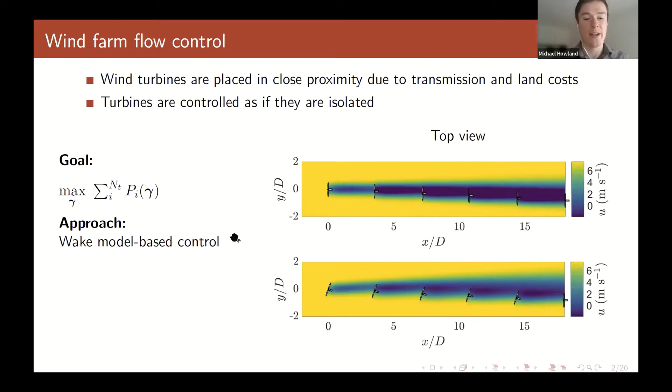The core challenge with selecting a wind farm control strategy based on wake models is that wake models fundamentally parameterize physical processes in the atmosphere. A good example of this is that they parameterize turbulence in the atmosphere and also in the wind farm flows through a wake spreading coefficient.

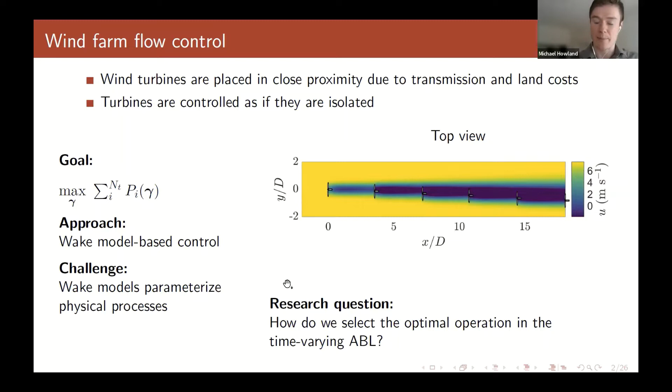Our research question is, how do we select the optimal operation for the wind farm, the optimal yaw misalignment angles, in the time-varying atmospheric boundary layer, which is evolving its mean state in time.

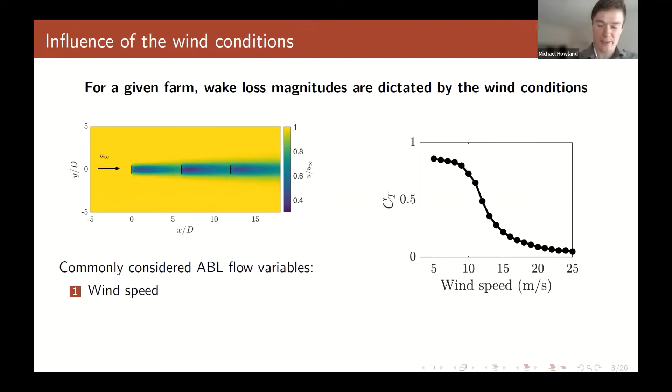I want to highlight a few of the leading order wind conditions which can influence the wake dynamics in the wind farm and therefore influence the optimal control strategy. If we start with a standard base case, here again a wake model with flow from left to right, for standard operation in region 2, where the turbines are in a line and are interacting with each other, we can visualize the effect of a few different atmospheric conditions on this wake interaction.

We can start by looking at the effect of wind speed. As we start to increase the wind speed, we see that the turbine thrust, the coefficient of thrust here visualized, starts to go down, and it goes down non-linearly. As we increase the wind speed, the thrust that each individual turbine imparts on the wind will go down, and therefore the magnitude of wake losses will go down. So we expect that for different wind speeds, our control strategy will change.

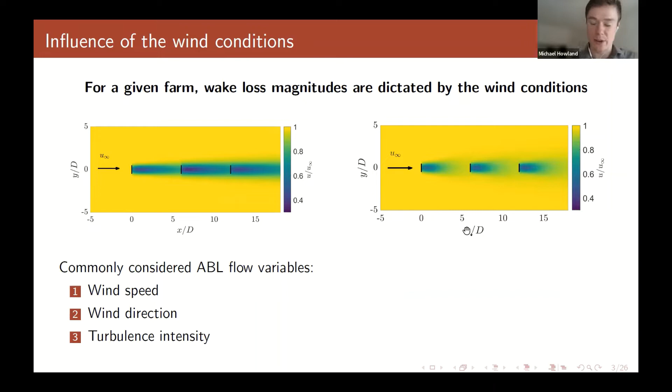Another primary influence in the atmosphere is the turbulence intensity. From left to right, I've increased the turbulence intensity, or the degree of wake recovery and wake spreading, in this wake model visualization. We can see that the wake interactions are less severe, and therefore this will affect the control strategy.

So how has this been handled in the past in the context of wake steering control?

So the standard approach to incorporate these atmospheric conditions that I mentioned on the previous slide has been to use an open loop control strategy where we have some controller which has some low fidelity wake model baked in. We input, it's a parametric wake model, it inputs wind speed and wind direction, which has the influences that I showed in the previous slide.

But we also need to know what the wake model parameters are, and in particular, the wake spreading rate, which dictates the wake recovery. How this has been handled in the past is that the wake recovery has been estimated using an empirical function, which depends on the turbulence intensity. So the turbulence intensity is fed in, an empirical function estimates the wake model parameters, that is then fed into the control, which along with the wind speed and wind direction, is then able to estimate the best yaw misalignment strategy for the wind farm.

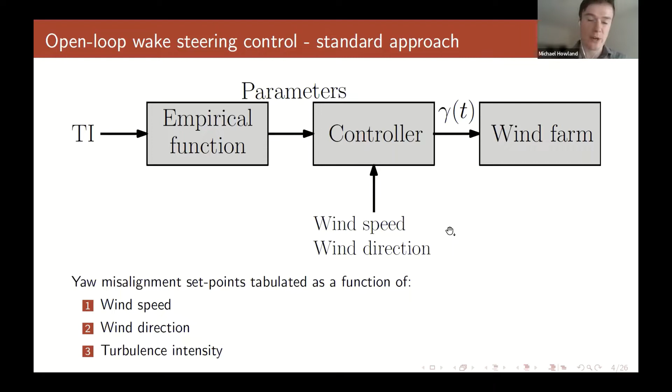And so what does this estimation of this empirical function look like in practice in traditional wake model tuning?

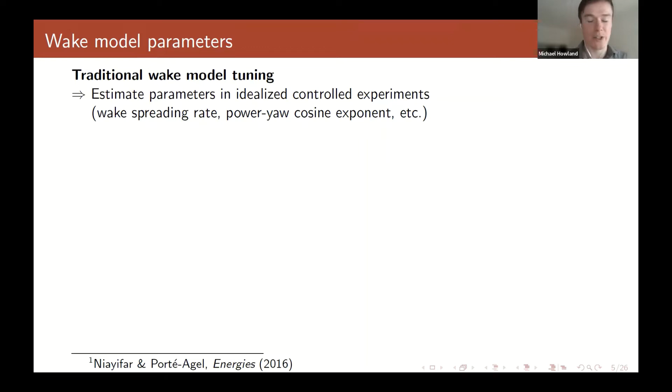In practice, in the past, this has looked like estimating wake model parameters in idealized controlled experiments. Those parameters could be this wake spreading rate, which I've mentioned a few times now, but it could also be other parameters which exist in these wake models. For example, this power-yaw cosine exponent, if you're interested in the power production of a yaw misaligned turbine, or again, it could be this wake spreading rate.

This very nice paper gave us an instructive introduction into this domain where they compared a wake model to large-eddy simulations in an offline tuning experiment. They actually showed very nicely that the wake growth rate, this wake spreading rate in their wake model compared to their simulations, varies pretty much linearly with the turbulence intensity. So this function would then be the empirical function that would be used on the previous slide.

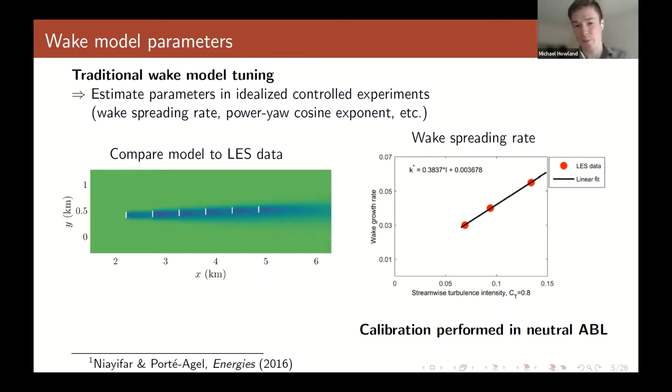This paper has proposed this function. It's been used many times in the past. But it's worth noting that the authors highlighted that this calibration was performed using large-eddy simulations with a neutral atmospheric boundary layer. So this inherently neglects certain properties which exist in the true atmospheric boundary layer. The effects that are often neglected in traditional wake model tuning more broadly are stratification, wind speed shear, wind direction shear, partial wake interactions, and other atmospheric boundary layer effects which may exist in real operational wind farms.

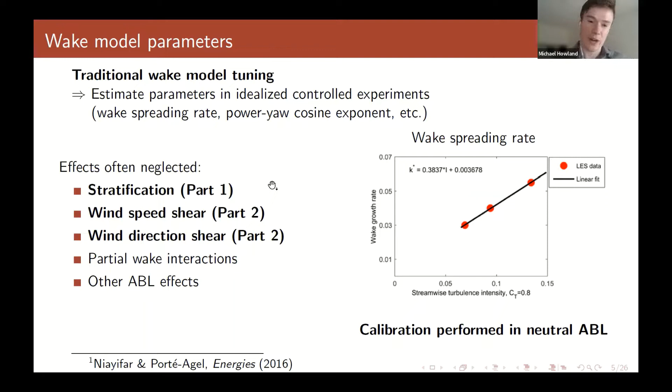So in this particular talk, I'll focus on stratification and also wind shear in parts 1 and 2, and I won't discuss the others.

Coming to the outline, in the first part of this talk, I'll discuss our work developing a closed loop wake steering control strategy with a focus on characterizing the role of the atmospheric stability on the wake recovery. Then I'll discuss our work in power-yaw modeling, which is aiming to elucidate the effects of atmospheric boundary layer wind shear on the power production of yaw misaligned turbines and wind turbines more broadly. And then I'll wrap up with some conclusions and next steps.

Returning to our primary question, we're interested in selecting the optimal operation of the wind farm, and in particular, the optimal yaw misalignment angles in the time-varying atmospheric boundary layer. So for that, we proposed a closed loop control strategy, where we have the wind farm, which is operating at time. It sends its power production measurements in the form of SCADA data, if it's a utility scale wind farm, and also wind conditions.

That's then fed into a parameter estimation routine, which estimates the model parameters that are relevant for the turbine wake model, the control strategy. The controller then estimates the yaw misalignment angles in time, which are then fed also to the parameter estimation and to the actual wind farm to impose.

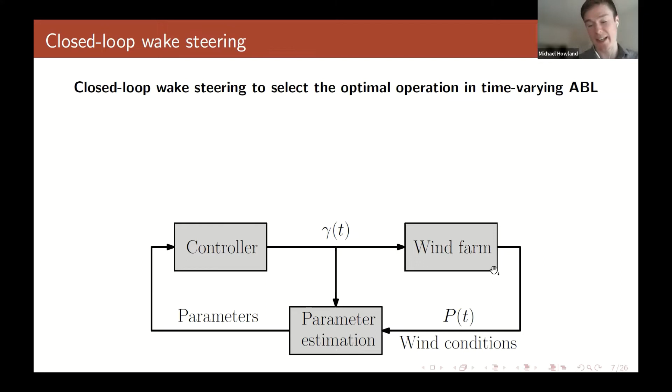The key three strategies that we use in this closed loop control methodology we've proposed are that we do parameter calibration uncertainty quantification based on the measured wind farm data, and we do this in a closed loop fashion in time. We also use a gradient-based optimization methodology, which is proposed in this 2019 paper to enable real-time wind farm control. We also do wind condition forecasting so that we make control decisions based on what's going to happen, or at least our best estimate of what's going to happen in the future, rather than some kind of moving average of what's happened in the past.

So I won't talk much about the wind condition forecasting in this talk, but details of that can be seen in this recent wind energy science paper.

Instead of tuning in an offline setting, which has been done in the past, we approach the parameter estimation more as an optimization problem, or alternatively an inverse problem, where we consider that we have some data Y and some model G, which depends on unknown parameters theta. The goal, very simply, is to minimize the data space objective function, finding theta star that gives the minimum discrepancy between the data we're measuring and our parametric wake model.

It's worth noting that this objective function can be generalized to incorporate regularization, model error, and so on. This can be solved in a variety of ways—one can use gradient-based optimization or derivative-free approaches to estimate theta star. In this talk, we're actually going to use the ensemble-Kalman filter as a parameter estimation methodology for this dynamical system.

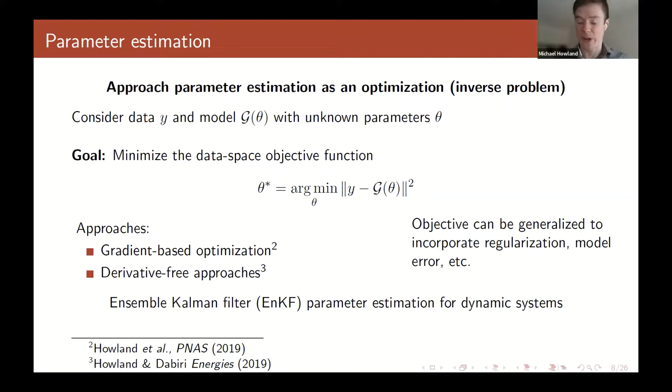But we can go beyond estimating a single value of theta star. We can actually estimate a probability distribution of theta, called a posterior distribution of the model parameters, rather than just a single value. We were interested in the probability distribution of theta, or more particularly, the conditional probability distribution of theta given the measurement of data Y.

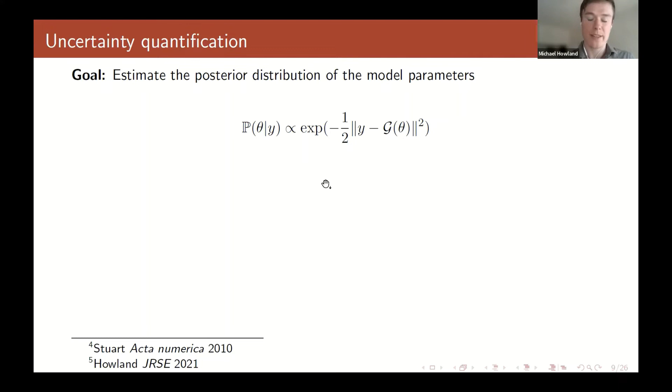If we make several assumptions, for example a Gaussian prior distribution and Gaussian noise based on central limit theorem arguments, then we can find that the posterior distribution is proportional to the exponential of the negative objective function that I showed in the previous slide.

What's nice about estimating the uncertainty of the wake model predictions is that you can then perform a wake steering strategy where you're not just maximizing the power production of the wind farm, but maximizing the expected value of the power production conditioned on the posterior distribution of the wake model parameters. That's what we did in this JRSE paper in 2021.

We found that incorporating the uncertainty in the wake model parameters increases energy production overall during our wake steering studies. It also improved the robustness of the control and quantifies the prediction uncertainty.

Lastly, in terms of the closed loop control strategy we've been developing, I wanted to quickly mention how we actually optimize the yaw misalignment angles. In this 2019 PNAS paper, we developed an optimization strategy based on analytical gradients so that we can perform real-time control.

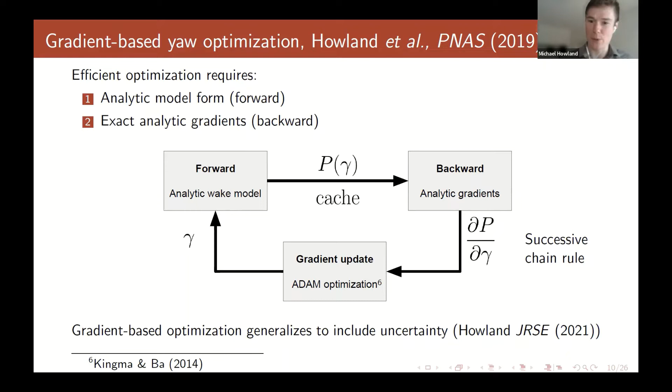That's our general closed loop wind farm control setup. We're quite interested to see how well it performs, and for that we used large-eddy simulation as a testbed control testing environment. We use our in-house large-eddy simulation code called PadeOps, which is a high-order pseudospectral large-eddy simulation code that simulates the stratified atmospheric boundary layer with full Coriolis effects.

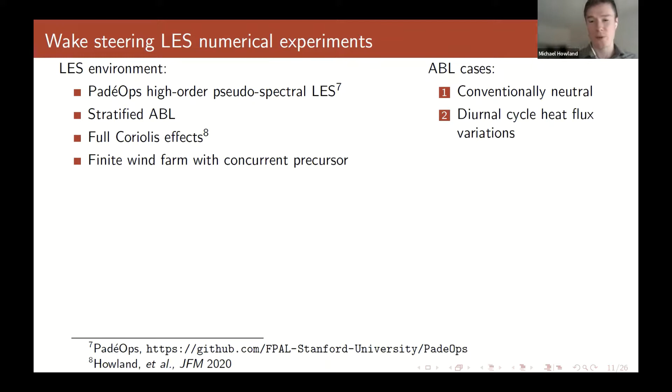We simulate finite wind farm behavior with a concurrent precursor methodology. First we focused on conventionally neutral atmospheric boundary layer, then on diurnal cycles. I'll explain more about each of those now.

We focused on the conventionally neutral atmospheric boundary layer, which incorporates stratification and Coriolis effects, but there's no surface heating. The mean statistics in this boundary layer are quasi-stationary, not evolving significantly in time except for turbulence and inertial oscillations from Coriolis effects. This is a nice testbed environment because the mean states aren't evolving, giving well-defined controller behavior for testing closed loop versus open loop control.

I won't talk much about the conventionally neutral test cases, which can be seen in this 2020 Wind Energy Science paper. Instead, we're more interested in presenting results related to the time-varying atmospheric boundary layer.

For that, we simulated a diurnal cycle with heat flux variations at the surface, which change the statistics in the atmospheric boundary layer as a function of time—the mean wind speed, wind profile, shear, veer, and other details—and change the stability.

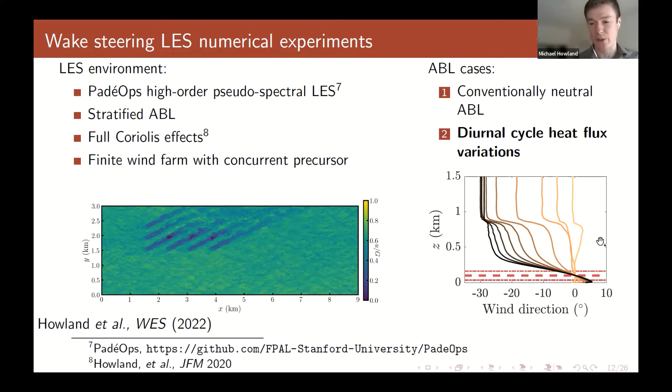I mentioned the wind direction changes as a result of the stability change, and also the wind direction change over the rotor area—so the wind direction shear changes as well. During the daytime, when we're well mixed, there's very little wind direction shear over the rotor area, but as we transition to the nocturnal boundary layer, there are substantial wind direction variations over that rotor area.

The question is, how does the wake model parameter estimation perform in this type of environment where the flow states are naturally evolving? This is a bit of a busy plot, so I'll walk through what each line is step by step. Here's the wind farm setup immersed in this diurnal cycle atmospheric boundary layer simulation.

I'll focus particularly on the power production of turbine 1 and turbine 4. Turbine 1 will always be free stream with respect to incoming wind, which comes either from left to right or from the bottom left corner of the domain, depending on the time in the simulation. Turbine 4 will either be in the wake of turbine 2 or in the wake of turbine 1.

I've plotted three different things. The solid lines are the LES power production for a case where we impose wake steering. The dots are the wake model predictions aided by the parameter estimation methodology I introduced a few slides ago—those dots sit on top of the solid line, and we can see it agrees quite well. Then the dashed line is for reference: a large-eddy simulation power production case where we impose yaw-aligned behavior.

So the wind turbines are always trying to yaw-align themselves and maximize their own power production. We can see generally that the wake model is performing fairly well at estimating the power production in the wake steering case.

We can also see the characteristic signs of wake steering. The power production of this yaw misaligned turbine, turbine 1, has decreased compared to the yaw-aligned case, but the power production of the downwind turbine has increased.

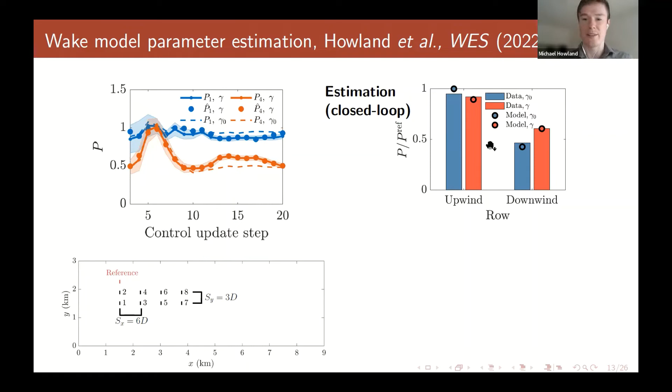In blue, I have yaw aligned, and in red, the wake steering case. The dots represent the wake model predictions. We can see that the wake model is generally capturing the trends associated with both the wake steering and the yaw-aligned case.

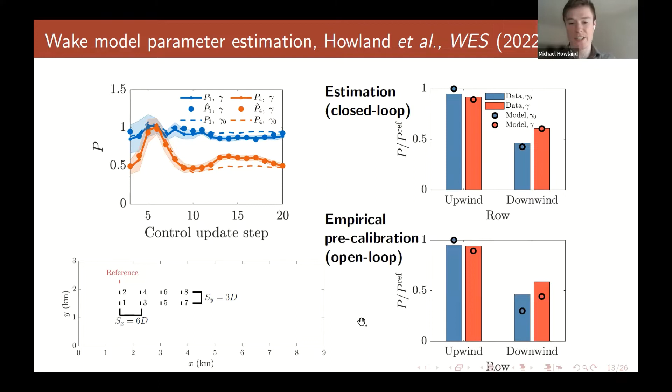If we compare that to the predictions associated with an empirical pre-calibration where the wake model parameters are estimated based on the turbulence intensity in the atmospheric boundary layer, which is evolving in time, we can see there's a much higher predictive bias associated with this pre-calibration, moving to this case of stability.

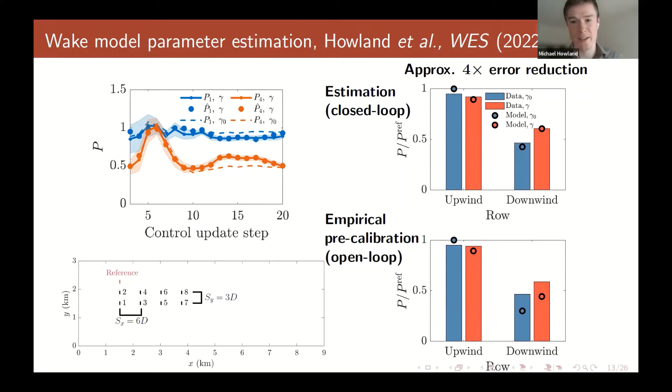In particular, in this study, we showed that this is approximately a 4 times reduction in error when we're using the active estimation of these parameters in time.

The final question, aside from the predictive capabilities of the wake model, is how does this all influence the power production when we're doing wake steering control?

Here we're showing the differences between the open loop and closed loop methodologies for the yaw misalignment of turbine 1 as a function of time. This is the yaw set point that the 2 different controllers are commanding.

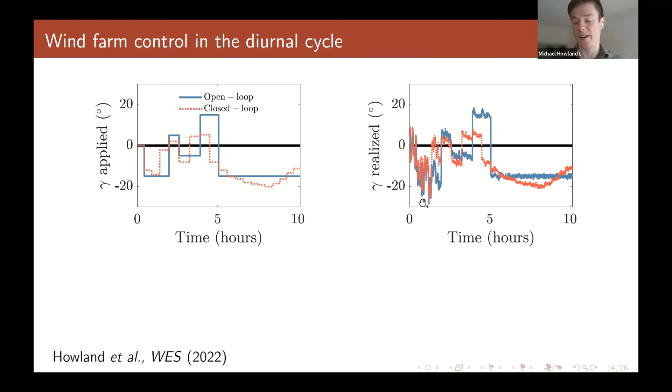We can see from a qualitative perspective, they're relatively similar, but there are quantitative discrepancies, certainly at particular times, especially during the transition period of the atmospheric boundary layer, transitioning from daytime to nighttime. The realized yaw follows similar trends, but with higher noise due to the turbulence in the simulation.

If we look at the energy gain compared to baseline yaw-aligned control, we can see some interesting characteristics. During the unstable and transition periods of the simulation, open loop control is actually decreasing power compared to baseline yaw-aligned control. So there's actually an energy loss by performing open loop wake steering.

But there's a significant gain using open loop control during the stable, more steady part of the simulation. Overall, the closed loop methodology has a much higher gain during the unstable and transition period, performs similarly during the stable period, and if you integrate over the full simulation, has a slightly higher energy production.

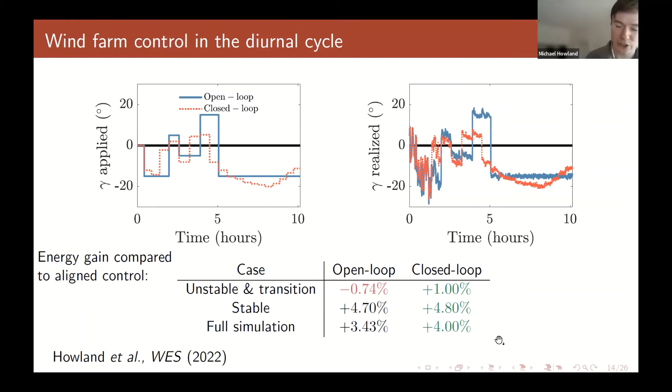Okay, so that was the story with respect to the closed loop wind farm control. I also want to talk about the role of atmospheric boundary layer shear on the power-yaw relationship, the relationship between the power production of a turbine and its yaw misalignment angle.

The first part of the talk was really focused on the degree of wake interactions between individual turbines, how the properties of the atmospheric boundary layer influence the magnitude of the wake recovery and therefore the wake interactions between the individual turbines.

But the potential for wake steering also critically depends on the relationship between the power production and the yaw misalignment of the individual turbines which are choosing to yaw misalign. So the question is, how has this been predicted in the past? How have we predicted the power production of yaw misaligned turbines?

Well, historically, we've used actuator disk theory for this. If you start with actuator disk theory, we make assumptions of one-dimensional uniform flow and uniform thrust over the rotor area, and we assume that the flow is steady and inviscid.

If I introduce a yaw misalignment, that introduces this yaw angle gamma between the incident wind speed and the unit normal vector. That dot product then gives us a cosine, raised to the third power. That's how we get this cosine-cubed estimate of the power loss for a yaw-misaligned turbine.

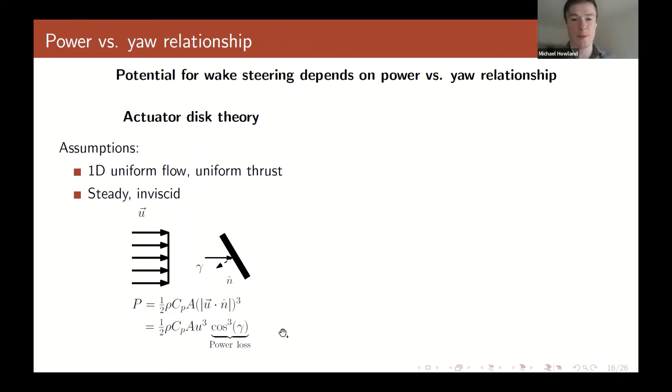However, in practice, this cosine-cubed power loss has not often been observed. So instead, we introduce this empirical quantity called the power ratio, which is the power production of a yaw-misaligned turbine divided by the power production of a yaw-aligned turbine.

You can also write that in terms of the coefficients of power. This has often been modeled in the past as: the power ratio is approximately cosine of the yaw misalignment angle raised to this empirical P sub P factor.

If you look at the literature, there's a huge spread in the reported values of this P sub P factor. In large-eddy simulations of the NREL 5 megawatt turbine, it's around 1.9. Wind tunnels have reported between 1.8 and 3. Field experiments have reported anywhere between 1.4 and 5.

So we can already say that the cosine model is insufficiently capturing the physical trends associated with the power production of yaw-misaligned turbines. Our hypothesis was that this was primarily associated with the assumptions of one-dimensional uniform flow and uniform thrust over the rotor area.

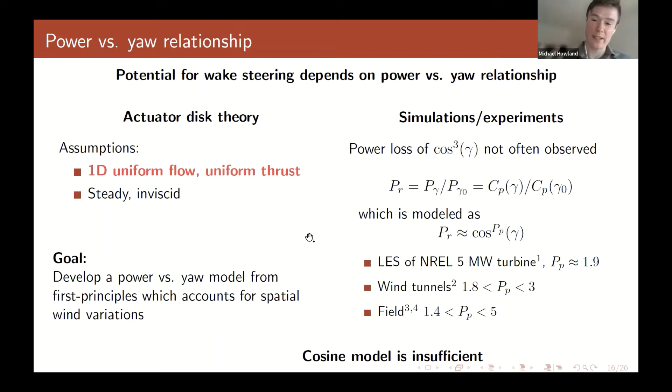Our goal was to develop a power versus yaw model from first principles, which accounts for spatial wind variations. I showed an example of spatial wind variations during the unstable boundary layer simulation. We saw that the degree of wind shear, wind direction shear, and wind speed shear changes as a function of time in the atmospheric boundary layer. We'd like to develop a model which can account for that variation in time.

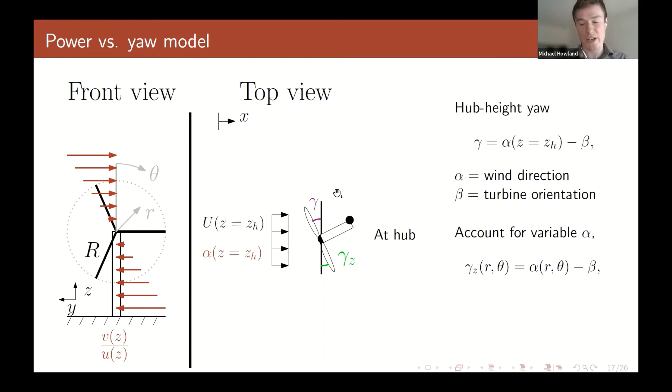But actually the wind direction is changing over the rotor area. That means we're more locally aligned below hub height, given the Ekman spiral, and more locally misaligned above hub height, because the wind direction is also changing over the rotor area.

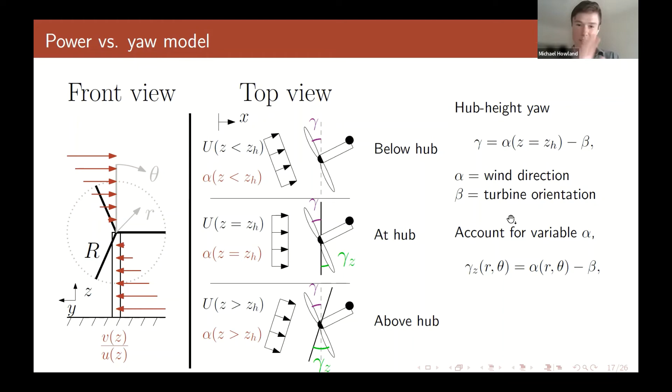So we really need to introduce a local yaw misalignment angle, which depends on the particular r-theta radial and azimuthal position in the rotor plane, because the wind direction depends on the r-theta position in the rotor plane and the turbine orientation beta, which is just the heading of the turbine — which direction it's actually facing.

So then we extended blade element theory to incorporate this variable yaw misalignment angle as a function of this r-theta position. That was done in this JRSE paper in 2020.

Then we can estimate the incremental torque as the radial position multiplied by the incremental tangential force, and the incremental power as the blade angular velocity multiplied by that incremental torque. Then this power ratio, which is really the power loss associated with a yaw misalignment decision, can be computed directly as the angular velocity of the yaw-misaligned turbine multiplied by the area integral of this incremental torque contribution.

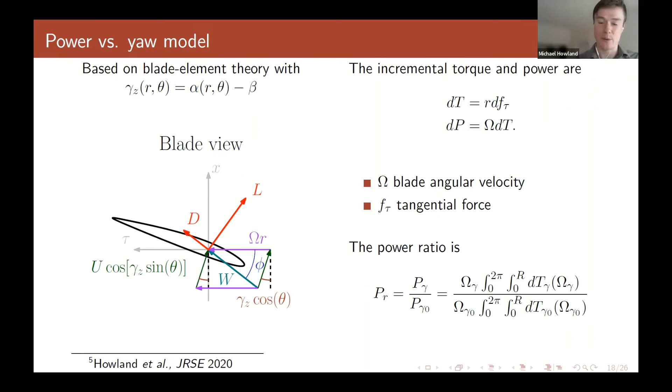That's in the numerator for the yaw misaligned turbine, and in the denominator we have the yaw aligned turbine. This directly gives us how much power we're actually losing by imposing a yaw misalignment for a given incident wind direction or incident wind conditions.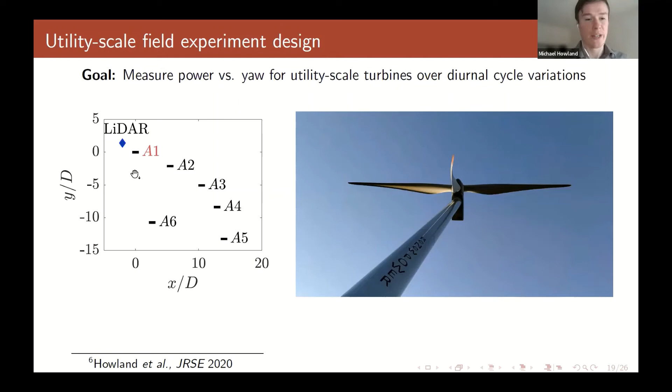So we were interested in seeing how well this model performs using power production measurements from a utility scale wind farm. We instrumented a utility scale field experiment, shown in this top view, where we have turbine A1, and we intentionally yaw misaligned this red turbine A1 as a function of time, from minus 25 degrees to plus 25 degrees in this sequence.

Here's what that looks like in practice. The red line is what we were trying to follow, and the dots are the measured yaw misalignment in 1 minute averages. We imposed this field experiment for a period of multiple months, 2 or 3 months.

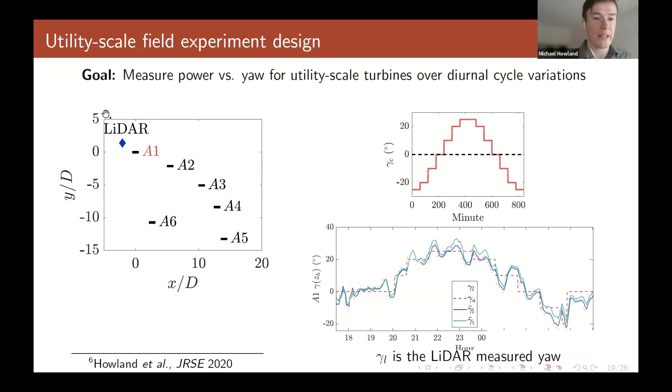So we measured the power production of turbine A1 as a function of this yaw misalignment. We also had this reference turbine A2 and a profiling LiDAR to measure the wind profiles incident to these turbines.

To give a sense of these wind variations as a function of time, during the daytime we have nominally power law type behavior in a median sense, shown as this black line. These different colors are 1 minute average realizations of the wind profile. There's some spread in those, but generally power law type behavior in the daytime wind conditions. The nocturnal conditions, the stable atmospheric boundary layer, is quite a different story.

We have the emergence of a supergeostrophic jet, which is actually below the wind turbine hub height at this particular site and during this particular field experiment, which is very interesting. Some of these 1 minute average realizations have quite a substantial negative shear over the rotor area.

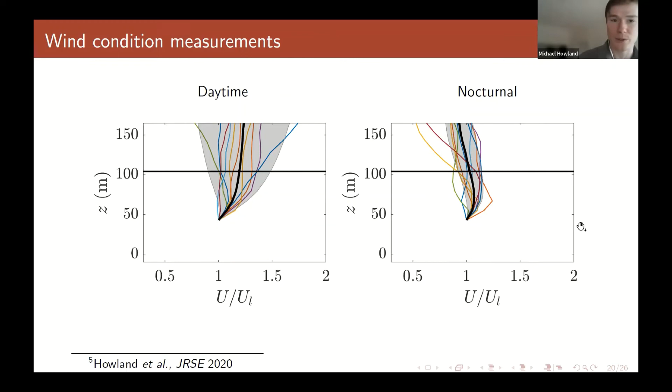So now moving to what this power ratio looks like from these field data: the dots are all of the data, then the purple dots are the median at each yaw misalignment angle, where the yaw misalignment angle is on the x-axis and the power ratio is on the y-axis.

I've plotted two cosine models: cosine cubed from actuator disk theory, and cosine squared, which could be, for example, some empirical estimate made using this cosine model. Comparing these cosine models to the purple curve, we see that neither one does particularly well.

One thing we can note from the purple curve is that it's actually asymmetric. At positive yaw misalignment, it's performing with higher power production than cosine squared should suggest, and at negative yaw misalignment, it's underperforming cosine squared. So it's asymmetric. The green model is our prediction from this new power-yaw model, and it's generally capturing the trends.

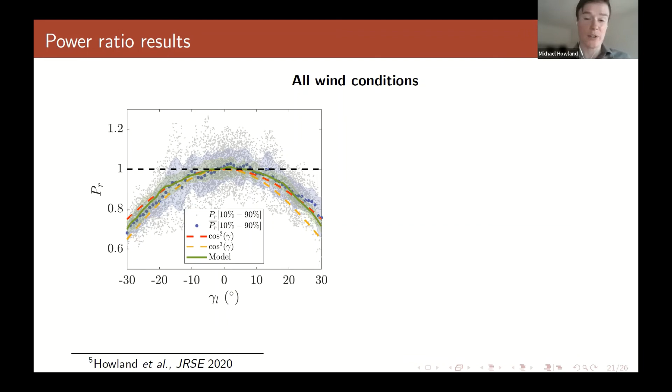But let's zoom in on this asymmetry for a second. It's very interesting: it has higher power production for positive yaw misalignment than negative yaw misalignment. So what we did is just take the difference.

We took the power production at positive yaw, subtracted away the power production for the same absolute value of yaw misalignment at negative yaw, and reported that as a percent difference. Here we see the data in purple and the model in green. Quite a substantial asymmetry in the power production, where in this particular case the positive yaw is better performing than the negative yaw.

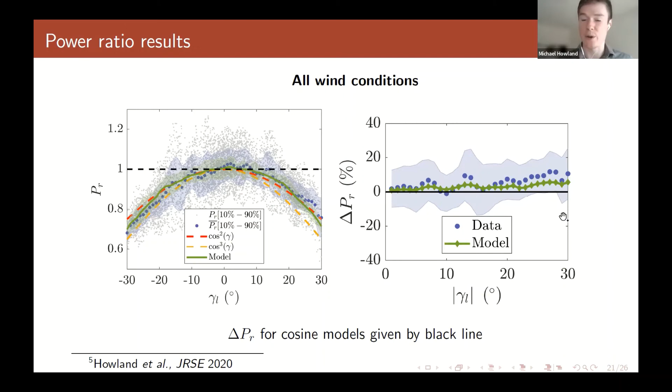It's worth noting that any cosine model predicts this black line, zero asymmetry by definition, since the cosine model is symmetric. So why is this happening? How can we explain these variations in the power production of the yaw misaligned turbine and this asymmetry?

Well, it turns out that it's fundamentally related to the incident wind conditions. If instead of looking at all the wind conditions aggregated together we zoom in on the daytime wind conditions, which have positive wind speed shear, power law type behavior, and very limited wind direction shear due to convective mixing, then we actually have the opposite trend: negative yaw misalignment outperforms positive yaw misalignment.

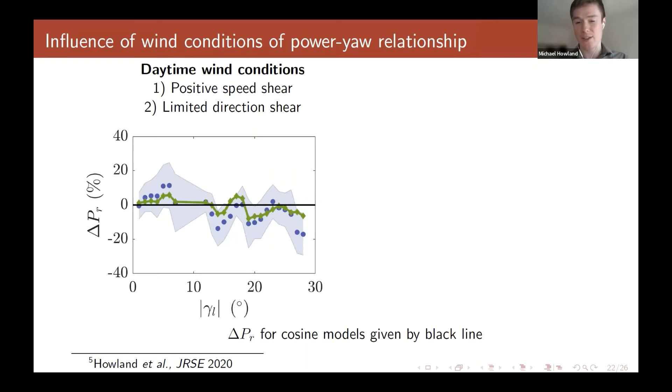It's a complete reversal of the trend I showed on the previous slide, which aggregates all the wind conditions together. If we look at nocturnal wind conditions, we have that negative wind speed shear, incident flow, and also strong wind direction shear. And then we again reverse back towards what we saw on the previous slide, where the positive yaw misalignment outperforms negative yaw misalignment.

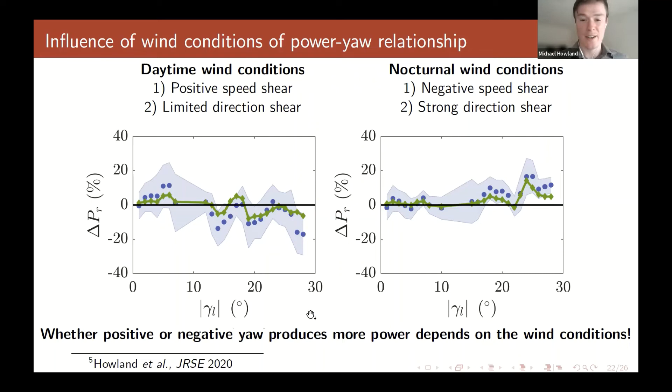The green is the model, and it's capturing these trends, fundamentally capturing these incident differences in the incident wind conditions. So the key takeaway is that whether positive or negative yaw misalignment produces more power inherently depends on the wind conditions, which are inherently changing in time in an instantaneous fashion, and certainly on an hourly basis during the diurnal cycle.

I know I went slightly long.

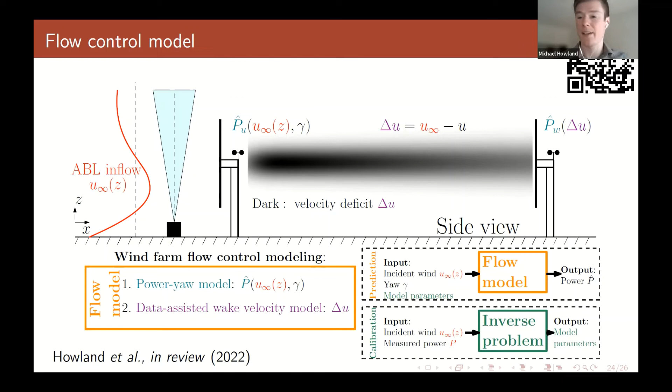So just quickly, I'll wrap up with conclusions. It made good sense to us to incorporate these two themes together, so that's what we've done in this recent paper, which can be accessed at the QR code in the top right corner, currently in review. We've combined this new power-yaw model that I showed in the second section with the wake model proposed in the first section into a wind farm flow control model, which incorporates both of those themes, and that can be seen in that paper. I'll just leave up ongoing work and next steps in the relevant papers, which can all be accessed in that QR code in the top right corner.

I'd like to thank funding from National Science Foundation, computer time from XSEDE to perform the large-eddy simulations, and also our partners Siemens Gamesa and Renew Power for performing field experiments. And with that, I will take any questions.

Thank you, Mike. This was a really great piece of work. Thank you for that very nice talk. I really like how you covered multiple disciplines, going from fundamental control theory and Kalman filters to transient LES simulations. I very appreciated that. Thanks, Bart. All right, questions?

I see we have a question in the chat. Sure, you can unmute yourself and ask the question. Hello, thank you very much, Bart, and also Michael for your presentation. I'll start my video and then you can see me. Here you are. How's it going?

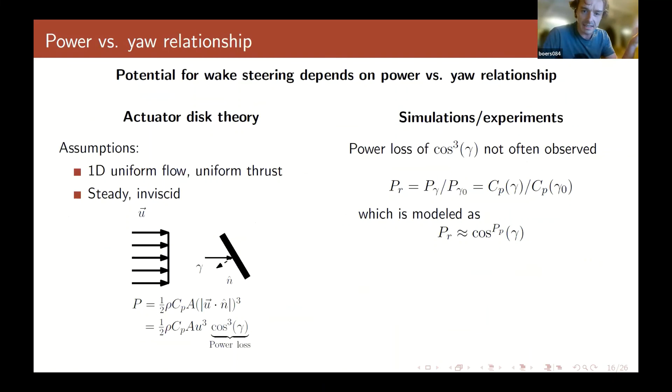Okay, very nice presentation. It was a dense one. I tried to follow everything. I'm not sure if I followed everything, but in the beginning you talk about an uncertain model that you have developed or identified, a wake model. And I was wondering, so then you compare, you say that model, when you use that in an optimization, that you can get some improvement of your wind farm performance. Is that correct, right? That's right.

Yeah, so that's what we showed in this JRSE paper in 2021. The key idea here is that this is all still for wake steering applications. So the idea is that instead of just making a wind farm control decision based on the mean values of the parameters, we try to incorporate our sense of uncertainty about those parameters in our decision making for the yaw set point. This follows a lot of really nice work from NREL and others, Julian Quick and others, which showed that incorporating uncertainty in the incident wind conditions helps to make improved wind farm decisions.

I see, nice. But I was wondering, did you also compare this optimization with an uncertain model to if you do not take this uncertainty into account in your optimization, with a deterministic way, let's say? Because I'm wondering maybe with the uncertainty, and if you do the deterministic way, you get somehow a mean or something, and you end up maybe with similar results. Or at least I would expect if you do the stochastic way or the uncertain way, that your control will be a little bit more conservative. I was wondering if you have...

That's exactly right. Yeah, that was the focus of the comparisons in this paper, essentially, that we compared it, of course, to baseline control with no yaw misalignment, but also with this deterministic approach where you only have theta star, the estimate of the model parameters, which try to minimize that data space discrepancy. And exactly, the approach was more conservative when incorporating the uncertainty, and we found that makes a primary difference in the unstable part of the boundary layer.

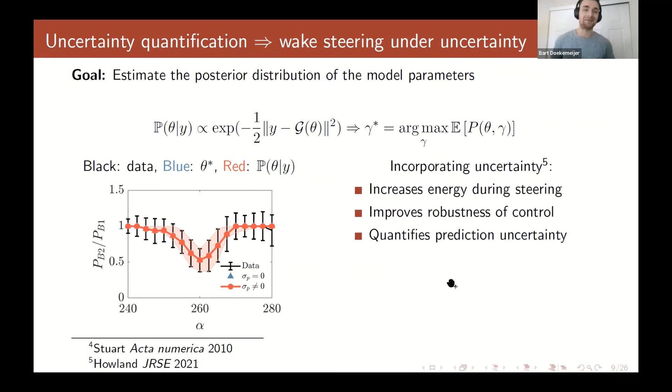I really like how we're moving to closed loop control more recently, and now we're using dynamic filters, dynamic models. I was wondering, have you looked at the stability of your control solution? Do you think there's a chance that your Kalman filter or your model somehow starts to diverge?

Yeah, this is a very important question, and it relates to a topic I didn't touch much on in this short talk, which is the time averaging associated with the comparison between the data and the wake model—a fundamental question still outstanding. The wake model we're using here is a steady state wake model, so it necessarily assumes essentially an infinite time average, which of course is not true in the field data.

As you continuously decrease the time averaging length in this comparison between the wind farm data and the parameter estimates, it certainly becomes more vulnerable to variations in the incident wind conditions.

We were quite concerned at first about the stability of the approach, especially because as you yaw misalign, you continue to estimate your parameters based on data which incorporates yaw misalignment. We thought that would be a major benefit in some sense, because the offline calibration doesn't include the parametric dependence of yaw misalignment on what the wake model parameters should be, which it should depend on to some extent. We didn't find issues in practice in an empirical way, but we haven't proved it in a pure theoretic way.

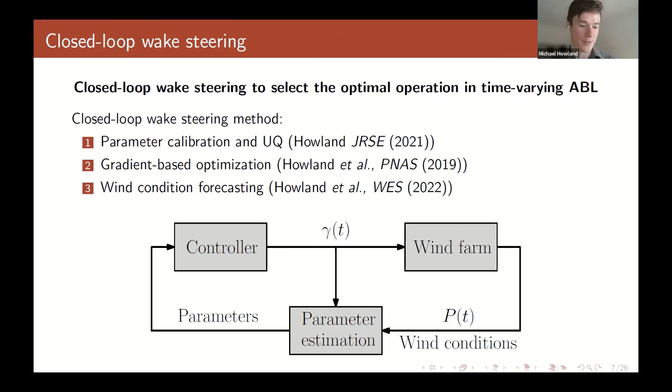We have wind condition variations that are only coming from variations in the heat flux. We don't have, for example, meso-microscale coupling. We don't have fronts passing through the wind farm, which can cause much more rapid time variations in the wind conditions. I think in those kinds of settings, also incorporating heterogeneity across the farm, these things are very important to address. In terms of capturing dynamic effects, that also depends on what your objective is.